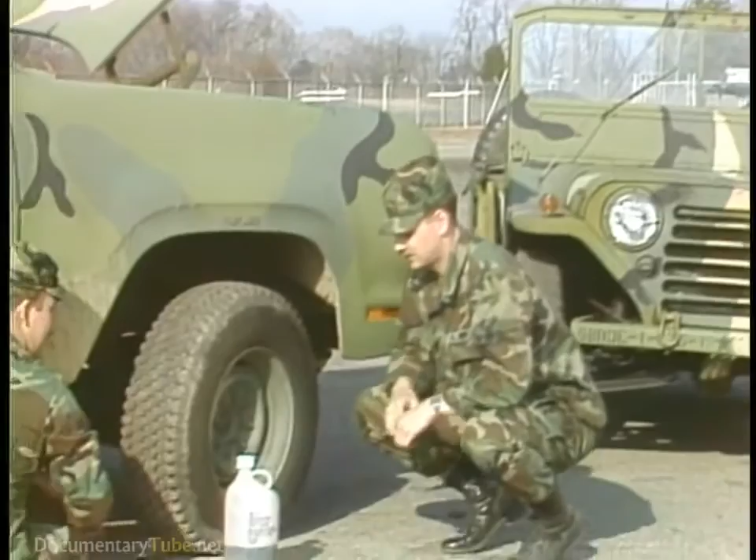When you have viewed this program, you should be able to understand the basic principles of hydraulic brake systems. You should be able to identify the components of the drum brake system used in the M151 and understand its principles of operation. You should also be able to identify the components of a disc brake system like that used in the M880 and understand its principles of operation.

In Part 1 of this program, we'll discuss basic principles of hydraulic brake systems that apply to both types of brakes, and then discuss the drum brake system used on the M151 vehicle. Part 2 will cover the disc brake system used on the M880 series vehicle. Get a good grip on the basic principles and you'll be in good shape to maintain brakes or troubleshoot and repair any hydraulic brake system you're working on.

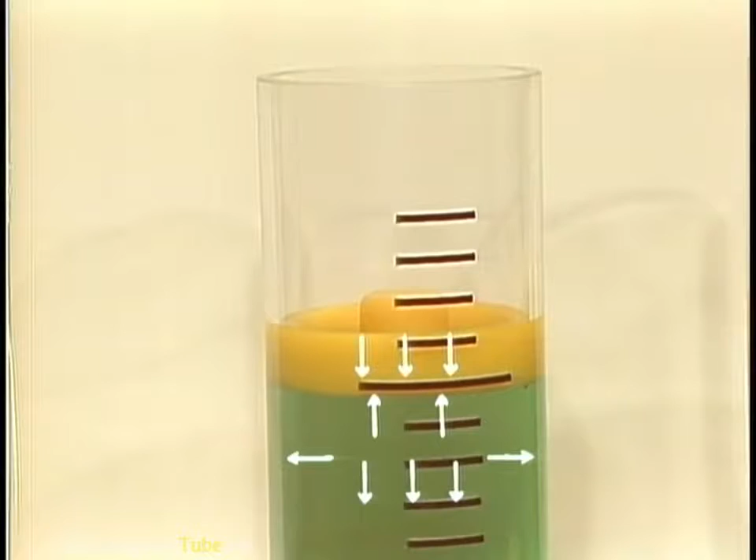First, let's look at basic principles of hydraulic systems because these control everything that happens in hydraulic brake systems. Under normal pressures, liquid cannot be compressed. This heavy weight, for example, cannot press the liquid down beyond its original level. It is, however, putting force on the liquid. This force acts in all directions, putting pressure on the weight itself and on the walls and floor of the container. The pressure is the same at all points.

Another thing about liquid is that it occupies the entire volume of the container, filling every space, no matter what its shape. This mock-up has a weight in each cylinder, and we'll call these pistons, like those you'd find in a hydraulic brake system. Let's watch what happens if we push down on one of the pistons, putting extra force on the liquid. The liquid is non-compressible, so its volume remains the same. The effect is to transfer the force to the second cylinder, where it acts on all surfaces, but only the piston is free to move, and so it rises.

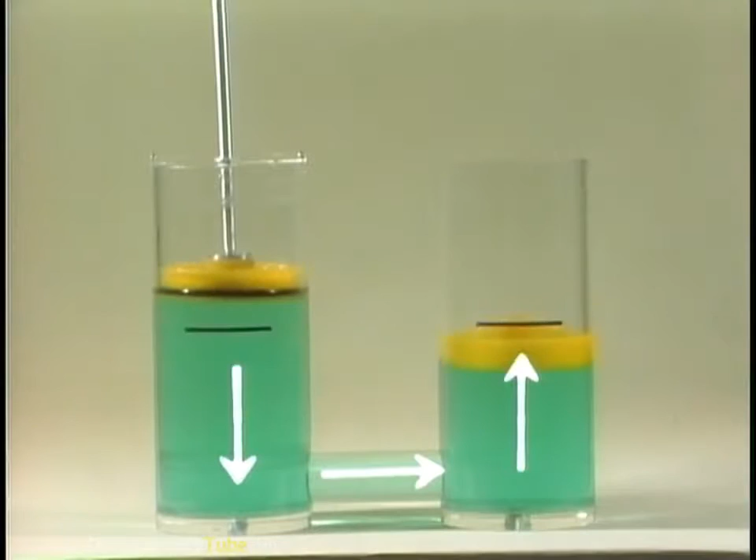Now we can see another important principle of hydraulics. The area of each piston is the same, so the right-hand piston rises by as much as the left-hand piston is pushed down. That's because the pressure is the same on the face of both pistons.

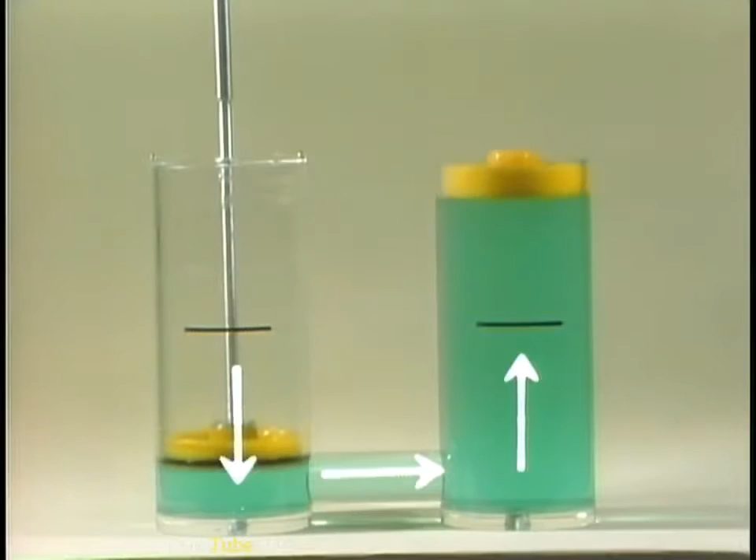Let's see what happens if one piston is bigger than the other. The small piston puts a certain amount of force on the liquid. At the larger piston, this same force acts on each area that's the same size as the small piston, so the force on the face of the large piston is multiplied by that amount. This means the force applied by one piston can be multiplied many times just by enlarging the area of other pistons in the system. One other thing happens. The smaller piston has to travel farther to raise the larger piston by the same amount as before.

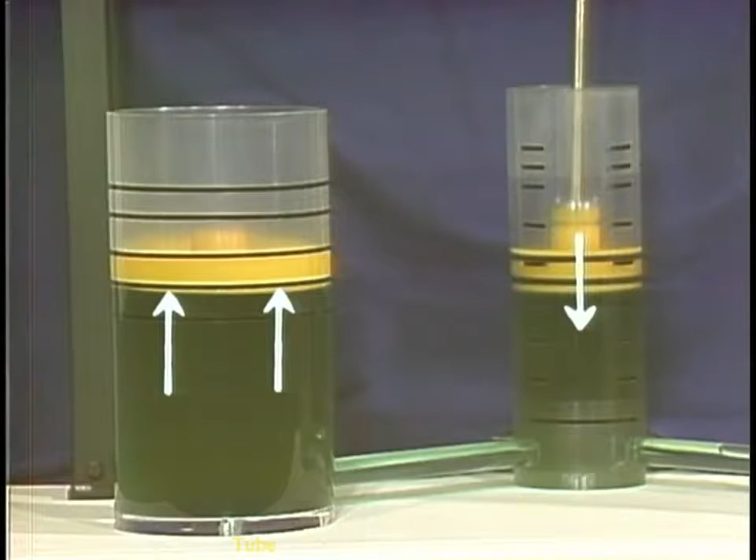The same things happen if, instead of one large piston, there are several whose total area is larger than that of the piston applying the force. Once again, the liquid can't be compressed, and its volume remains the same as force is applied, so the force is transferred to each piston in the system simultaneously.

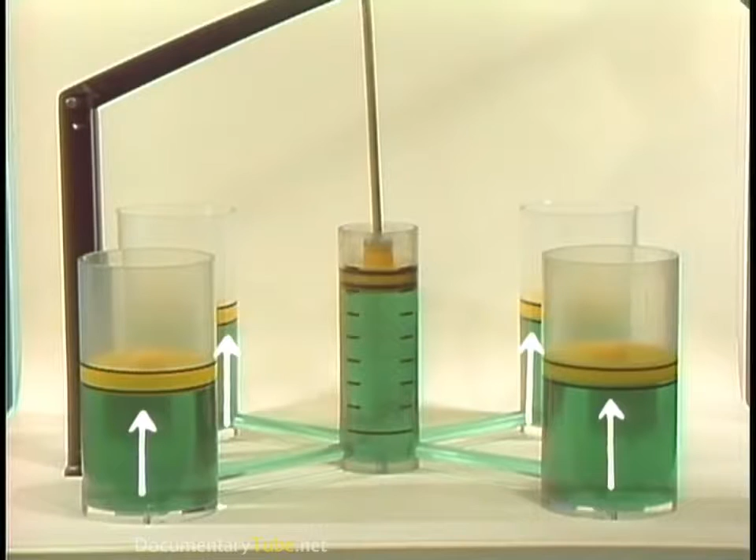This is like the situation in a hydraulic brake system. The cylinder with the piston that applies the force as the lever is moved is like the master brake cylinder. The connecting pipes are like the brake lines. And the four cylinders with pistons are like the wheel cylinders, except that in each M151 wheel cylinder there are two pistons, not just one.

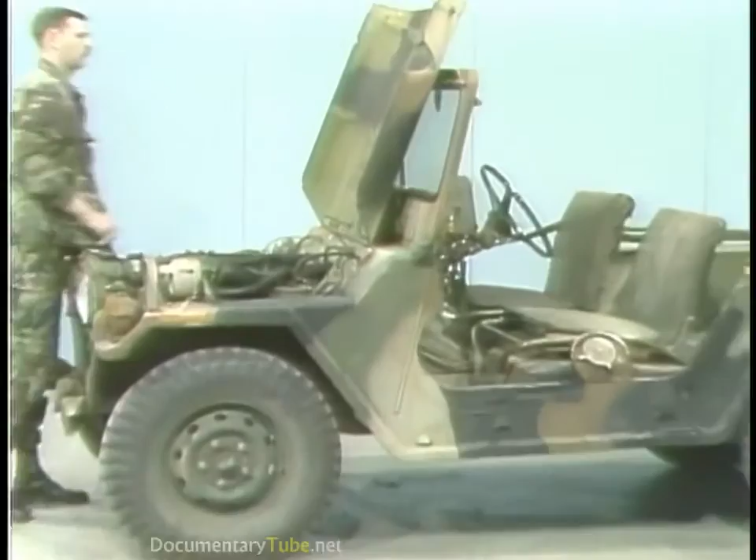Keeping the principles we've just talked about firmly in mind, let's look at each of those components as they appear in the M151 drum brake system. Let's start by looking at the master brake cylinder. It's hard to see because of the way it's installed, so let's look inside the vehicle. The master brake cylinder is the heart of the hydraulic brake system. The brake pedal moves a piston inside the cylinder by means of this push rod.

A reservoir containing brake fluid is filled through this neck. Brake fluid also fills the brake lines through this outlet. They connect the master cylinder to the wheel cylinders at each wheel assembly. For a closer look at a wheel cylinder, let's go right into the brake assembly with the wheel and brake drum removed.

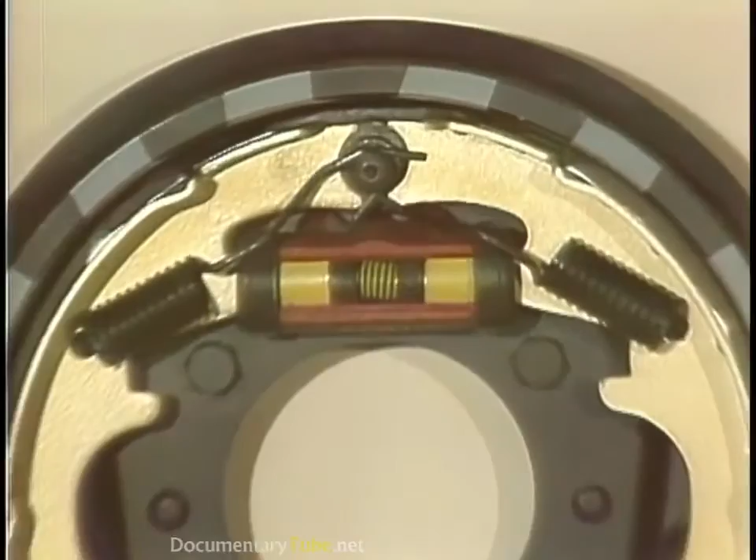In the M151, the wheel cylinder is located near the top of the brake assembly. Pistons inside the wheel cylinder bear against the studs of two brake shoes. These brake shoes are retained by springs, so they are fully floating and self-centering.

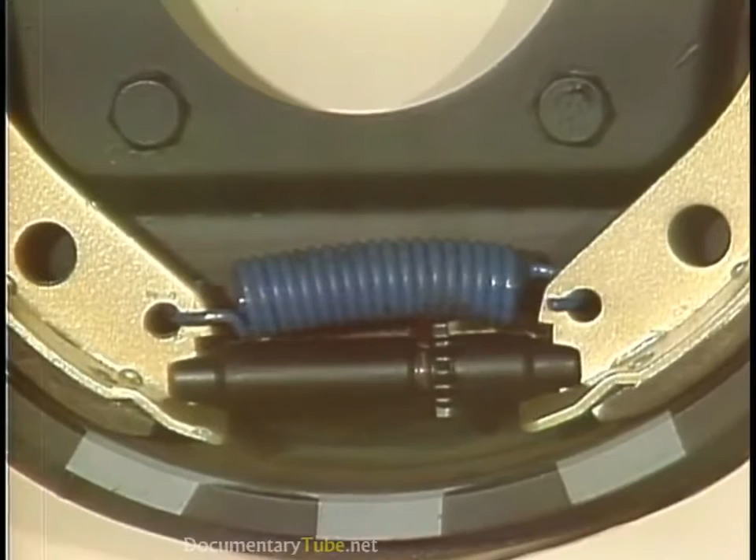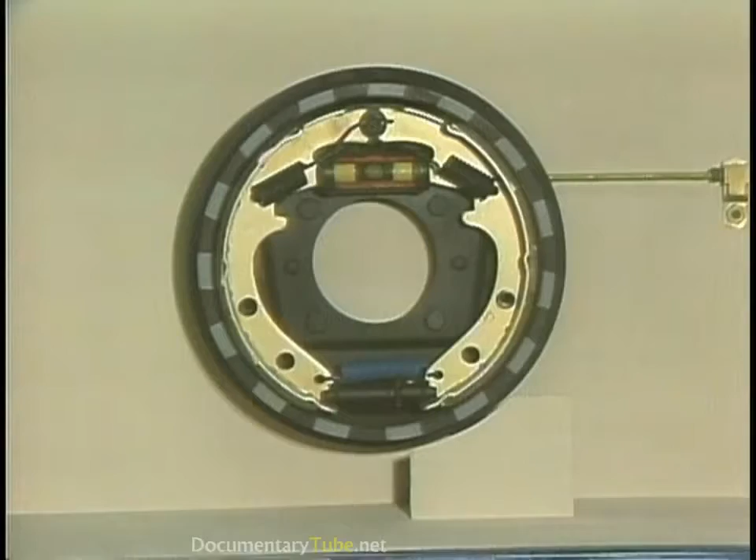The base of the shoes engage an adjusting screw, often called a star wheel, and are coupled to it by a return spring that also helps pull the shoes away from contact with the drum. Upper ends of the shoes fit against a hold-down anchor pin at the top of the brake assembly. The brake shoes are surfaced with linings that will wear down as the brakes are used.

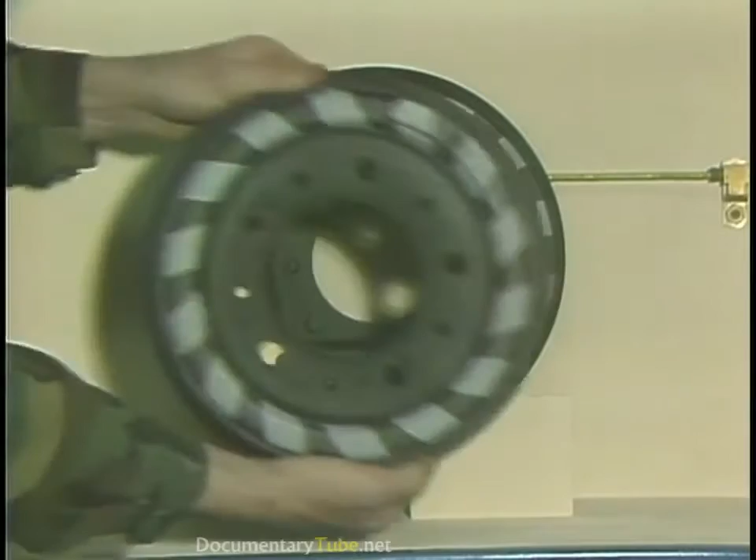The brake drum mounts over the brake shoes, which apply pressure to the inner surface to stop wheel rotation. Now, we'll concentrate on the principles of operation of a service brake system using drum brakes like that in the M151.

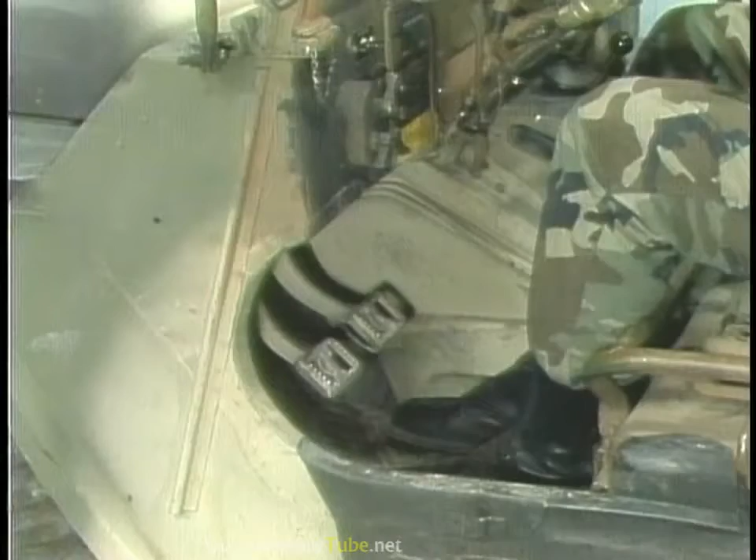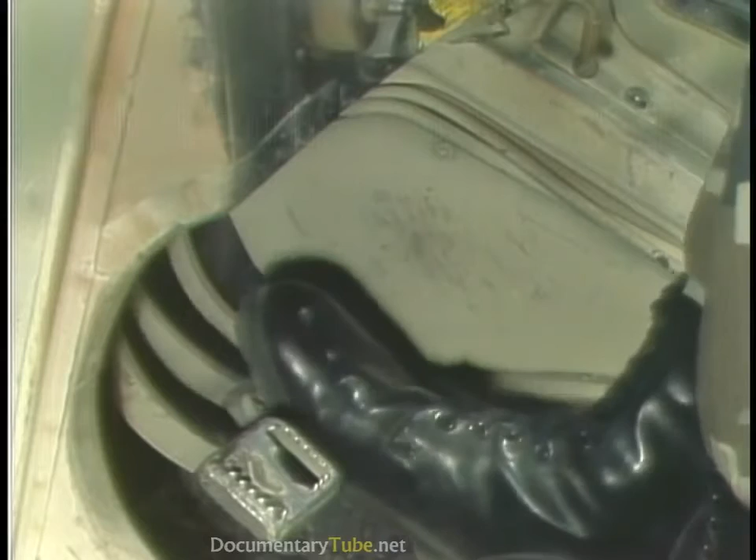In this system, the brake pedal is a lever that multiplies the amount of force applied by the operator by mechanical means. But that force is multiplied further by the hydraulic system. So first, let's look at the active hydraulic components: the master cylinder and wheel cylinders, to see how that happens. Then, let's see how all parts operate as a system to make the drum brakes work.

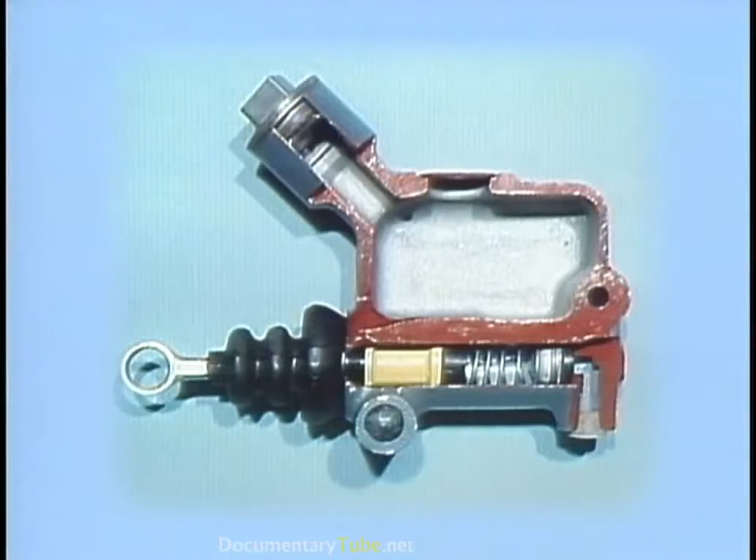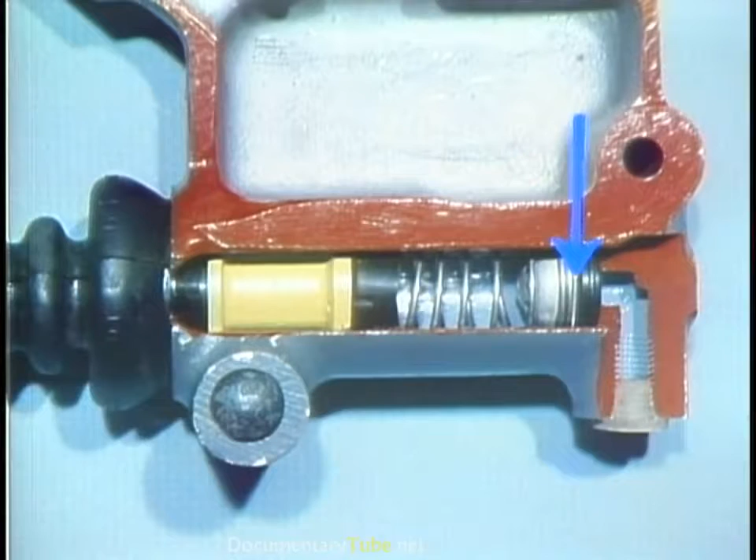The master cylinder has two basic sections. One is a storage area called a reservoir for the fluid. The other section is a cylinder which contains a spool-shaped piston. Small holes are drilled through one rim of this piston. The cylinder also contains two sealing cups, a return spring, and an outlet check valve called a residual pressure valve with its own spring. A push rod transfers brake pedal action to the piston.

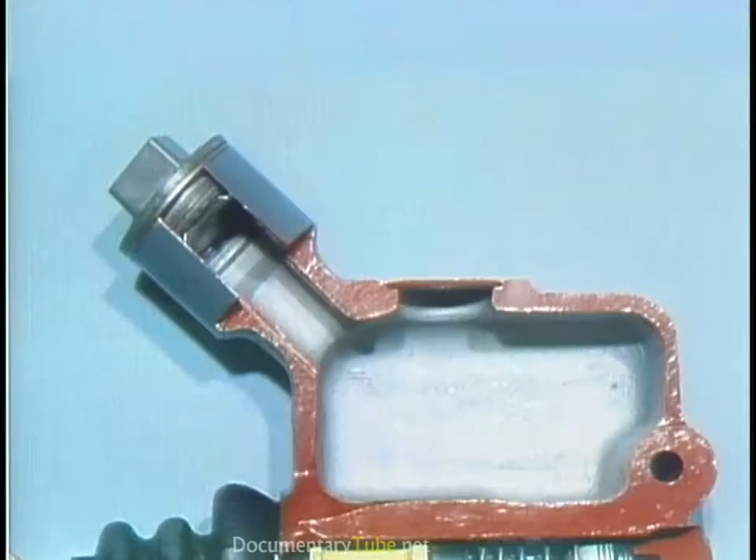The reservoir contains a supply of brake fluid. It's important to leave some space above the brake fluid to allow for expansion. Brake fluid must not be allowed to drain out of the reservoir completely, because this will let air into the brake lines, and we'll see what effect that has later. Your manual will tell you what the proper level is. Keep it there at all times, and you won't get yourself or the users of the vehicle in trouble.

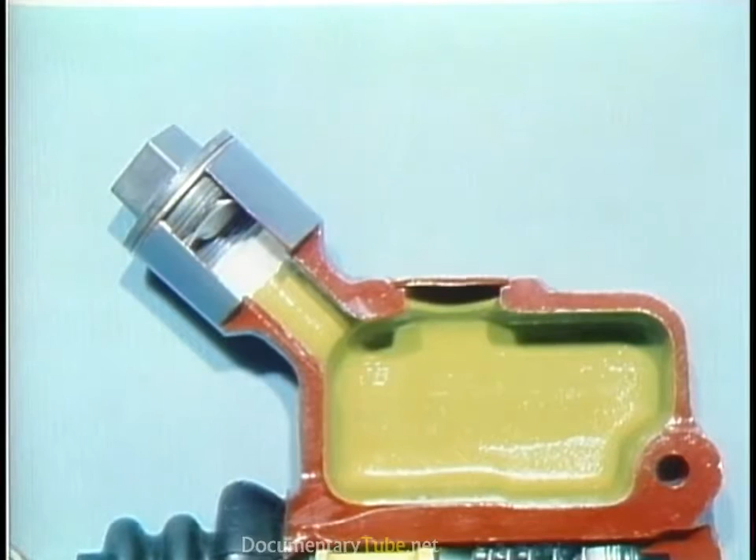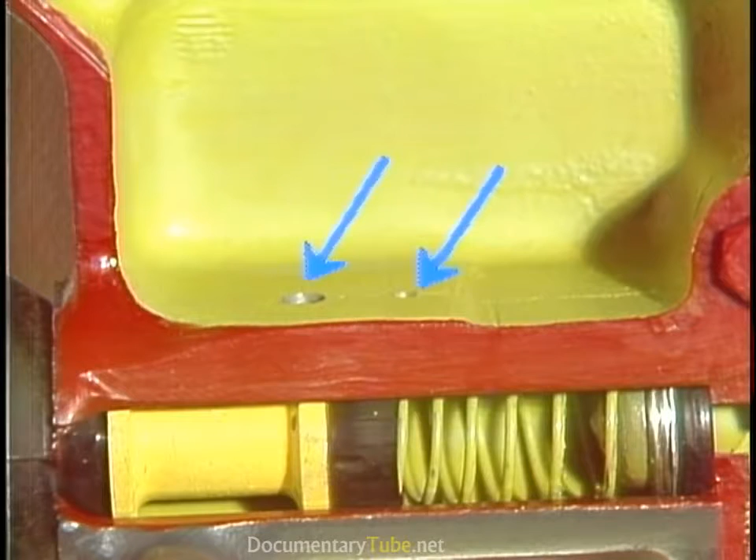One thing more about brake fluid: it absorbs water, which could cause serious problems throughout the brake system, so keep the reservoir tightly covered at all times. The two ports in the base of the reservoir provide pathways for brake fluid movement. The filler port is larger and supplies brake fluid to the system. The compensating port is smaller and allows passage of expanding or contracting fluid.

Fluid movement is controlled by the action of the piston and two cups, which both point forward. As the push rod transmits pedal motion, the spring applies force against the residual pressure valve, while at the same time the piston cup closes the compensating port. This primary cup faces forward, and as piston motion continues, it seals in the pressure that now starts building up in the outlet end of the cylinder.

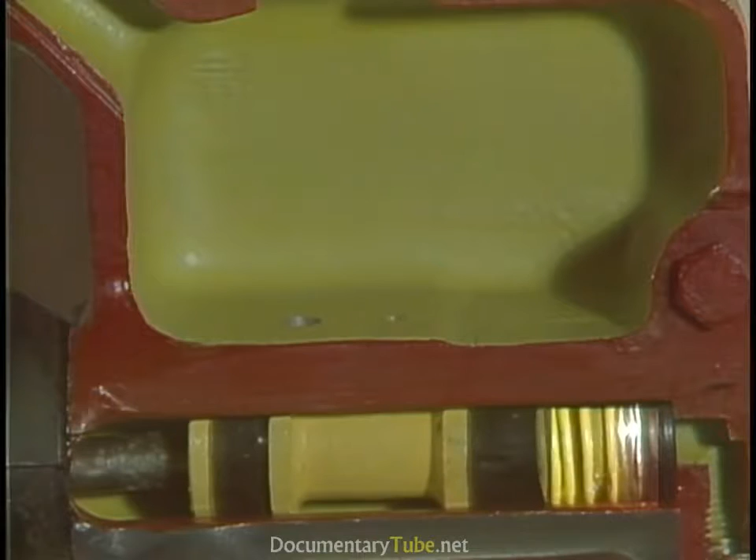This fluid pressure unseats the residual pressure valve, opening the way for the brake fluid to pressurize the brake lines and wheel cylinders. We'll look at what happens there in a moment. For now, let's follow the action in the cylinder when the brake pedal is released. The spring drives the piston and sealing cup backward, and so pressure forward of it and in the brake line drops.

This brake line pressure bears against the residual pressure valve, tending to hold it open. But eventually, as brake line pressure decreases, the spring overcomes its force and reseats the residual pressure valve. This traps a small amount of pressure in the brake lines and wheel cylinders, and we'll see the effects of that later. As piston motion continues, the compensating port is reopened. Brake fluid flows back into the reservoir through this path.

Also, the return spring pushes the piston back faster than fluid can return. This drops the pressure ahead of the cup, so it is now free to flex and unseal the holes in the rim of the piston. Fluid can now return to the outlet end by this path, ensuring that this space will be completely filled for the next braking action. The spring drives the piston back against its stop to complete the braking cycle. Because the secondary cup at this end of the cylinder also faces forward, no brake fluid can leak out of the system.

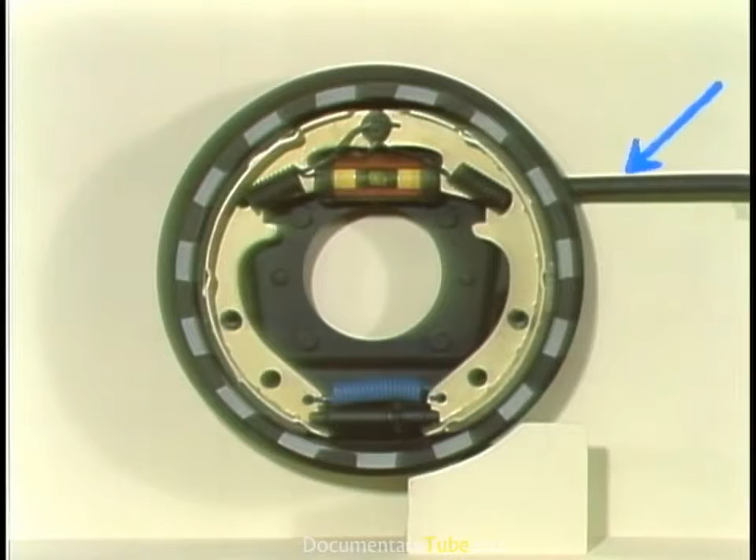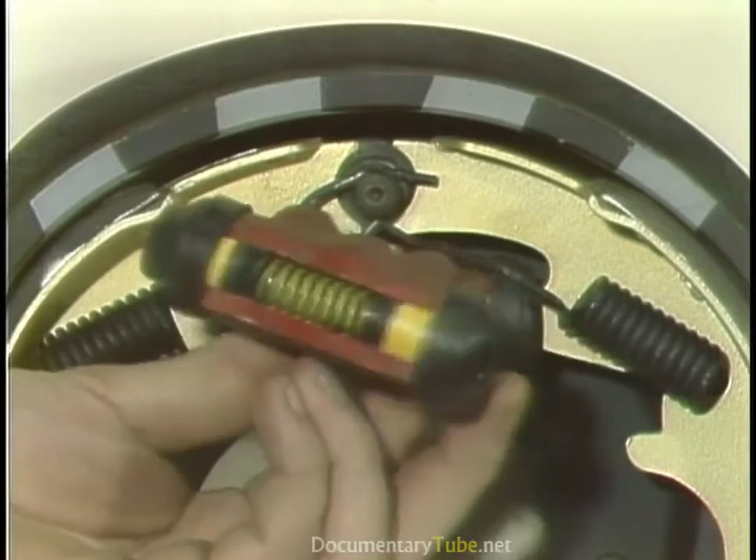Now, let's get into the other active hydraulic component, the wheel cylinder, and see how that operates. This device is connected to the steel brake lines by a flexible tube that allows for turning and up and down movement of the wheel. Inside are two pistons that bear on the brake shoes, a spring that positions sealing cups against the pistons, and a bleeder valve that lets you get rid of air in the brake system, as we're showing you here on another wheel cylinder.

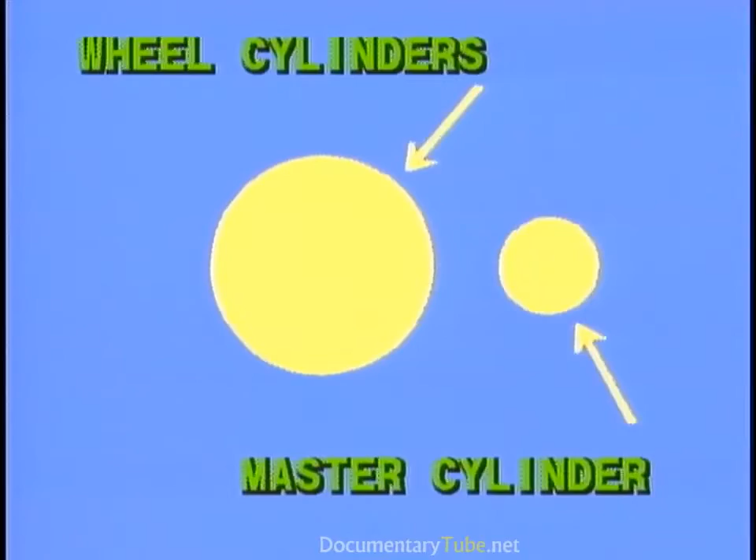The combined area of the wheel cylinder pistons is larger than that of the master cylinder piston. So the force that the master cylinder piston applies is multiplied several times, adding to the force provided by brake pedal leverage. As the piston in the master cylinder puts pressure on the brake fluid, this forces the wheel cylinder pistons to move the brake shoes apart. We've exaggerated the action here so you can see what happens. Brake shoe springs return the pistons to their stops as brake pedal pressure is released. The piston cups face inward, and so prevent brake fluid from leaking out.

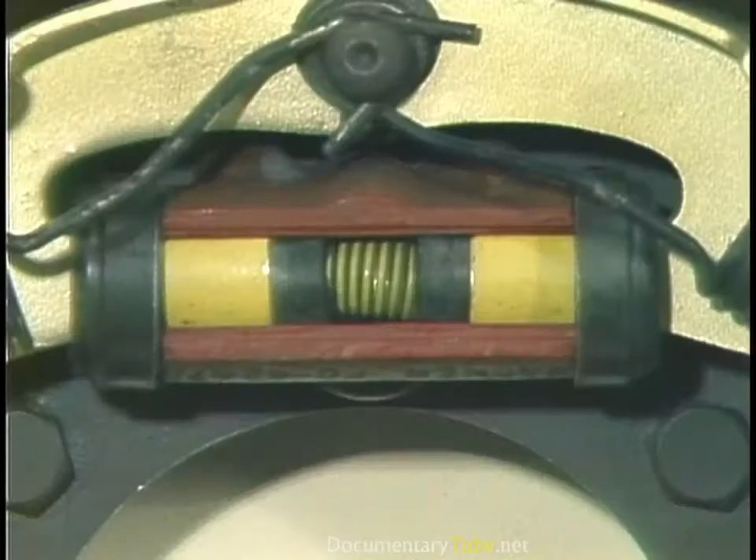Now we're ready to look at the entire drum brake system and see how it operates. You can control the amount of braking power the hydraulic system will deliver, all the way from slowing down wheel roll to wheel lock, by the amount of pressure you put on the brake pedal.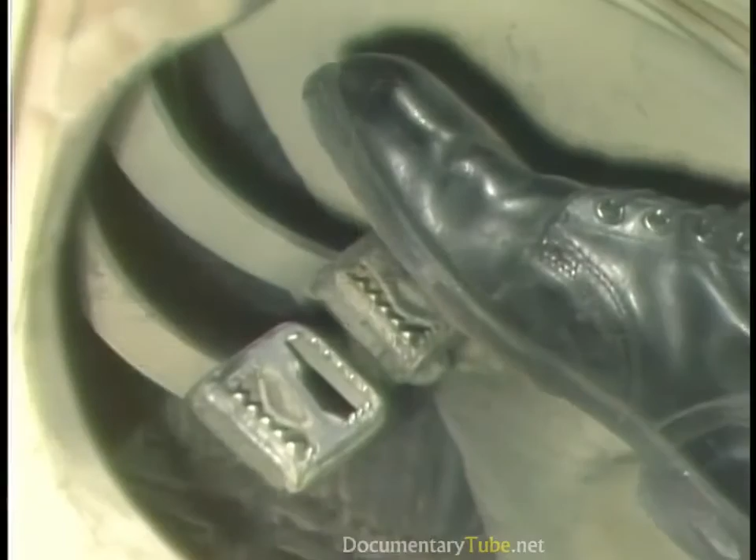Here's how it works. Remember that the brake pedal acts on the master cylinder piston the same way the lever acted on the piston in our hydraulic system demonstration a while back. The brake fluid is not compressible, so the further the lever pushes the piston, the further the fluid pushes the second piston. The same thing happens in the drum brake system. The result is that as pressure on the brake pedal increases, so does the pressure exerted on the brake shoes by the wheel cylinder pistons.

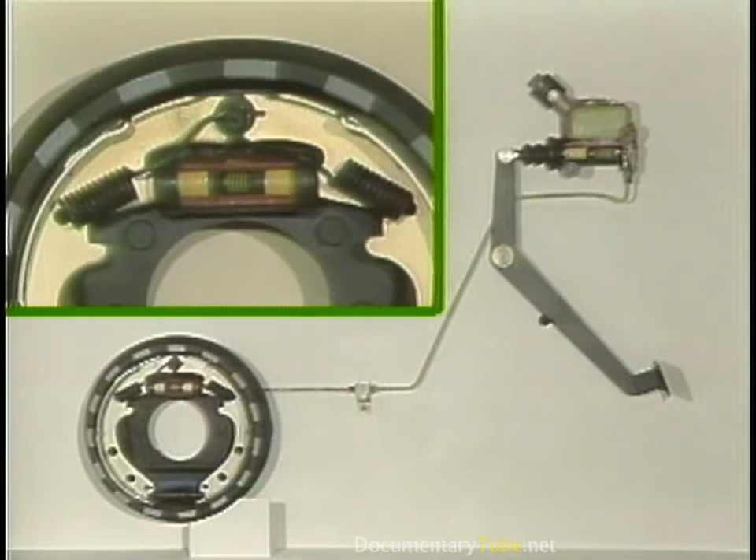Let's look at the situation using just one drum brake assembly, remembering that the same things happen at the same time at each wheel. This area is the braking surface of the drum. Actually, the gap between brake shoe linings and the brake drum is very small, but we're making it larger here so you can see what's going on.

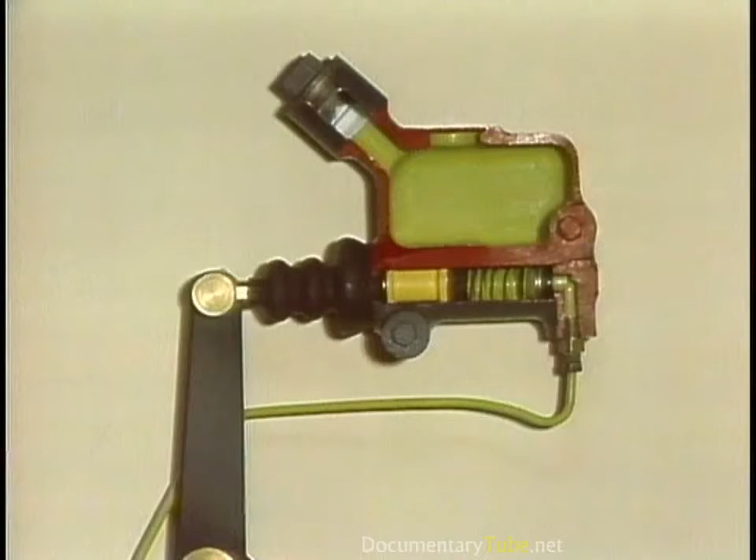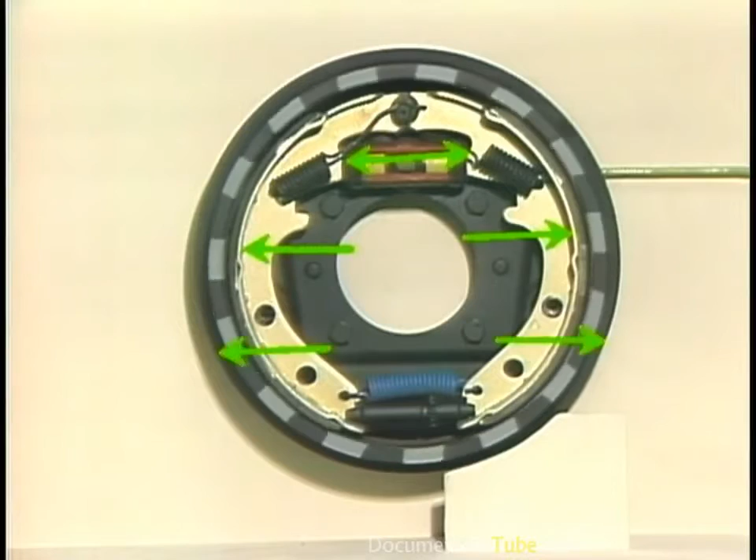Let's say the wheel and the brake drum assembly attached to it is rotating. Now, let's push down on the brake pedal. The master cylinder piston transmits force to the brake fluid in the brake line and in the wheel cylinder. Both pistons are forced outward against the brake shoes, and these in turn are forced into contact with the brake drum. The friction between the brake shoe lining and brake drum begins to slow the wheel down slightly.

Now, let's push down harder on the brake pedal. Because the brake fluid can't be compressed, it transmits this increased force against the wheel cylinder pistons, increasing the pressure against them. The wheel cylinder pistons push harder against the brake shoes, the brake linings harder against the drum, slowing the wheel even more. The master cylinder piston will increase pressure high enough to cause the brake assembly to slow the wheel to full stop or wheel lock.

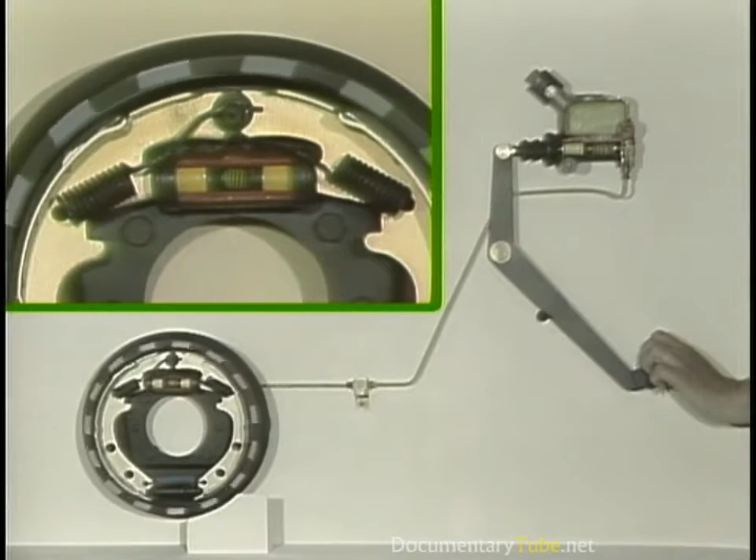Releasing the brake pedal lets the return springs pull the brake shoes back from contact with the drum and drive the pistons back to their stops in the wheel cylinder. The master cylinder piston, driven back to its stop, allows pressure in the system to decrease, but the residual pressure valve closes, keeping just enough pressure in the brake line and wheel cylinder to keep its sealing cups pressed against the pistons. These face inward, so no brake fluid can escape from the system.

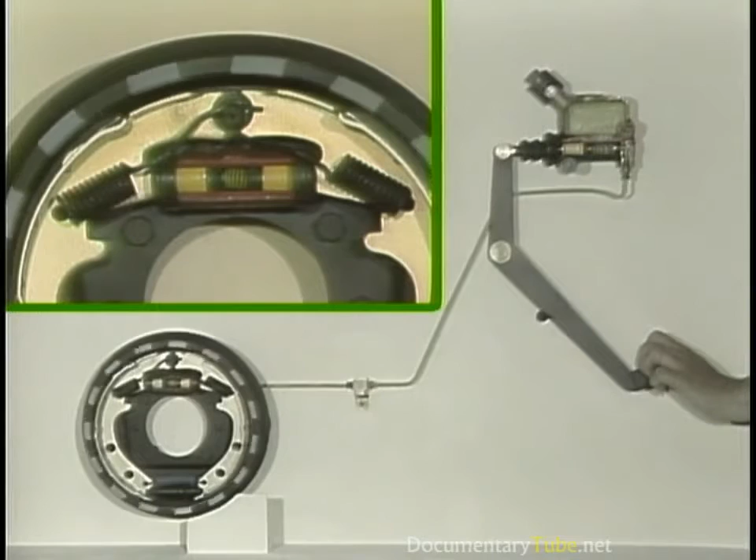If there is a lot of repeated braking action, the friction between brake shoe linings and drums will generate excessive heat. This heat can also heat up the brake fluid in the wheel cylinder, causing it to expand back up the brake lines to the master cylinder, where it later returns to the reservoir through the compensating port.

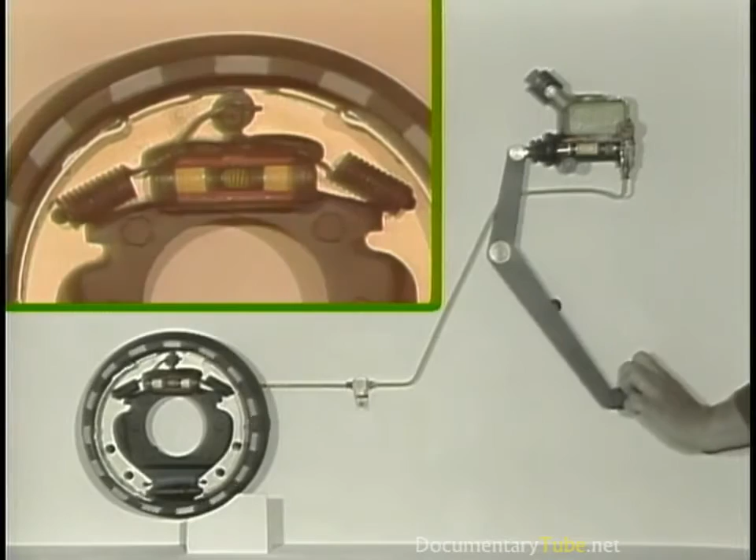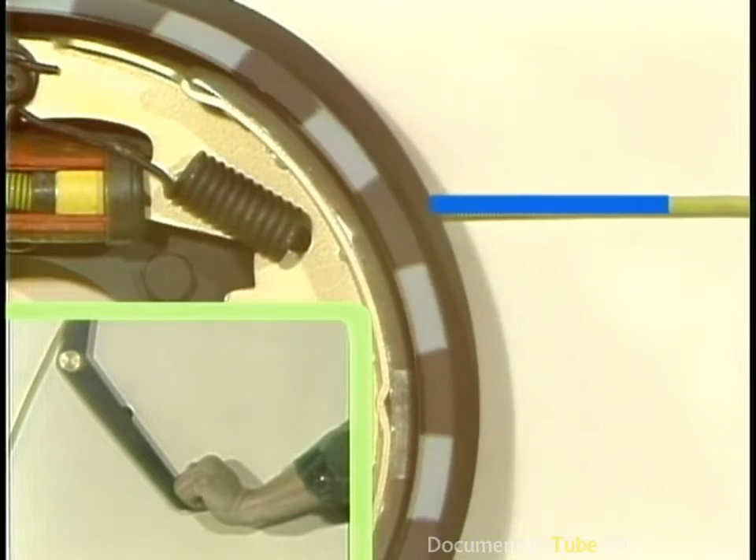Now, let's say some air is trapped in the brake line near a wheel cylinder like this. Air is compressible, and that can cause problems. Let's again push down on the brake pedal until the brake linings make first contact with the brake drum. So far, so good. But now, let's push down harder. Here's where the problem shows up. The increased pressure in the brake fluid presses against the air bubble and it shrinks.

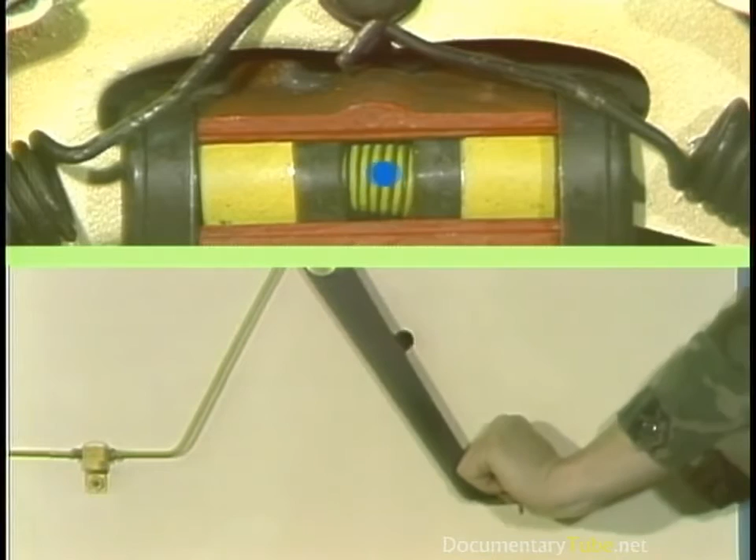Let's say the air bubble gets forced into the wheel cylinder. Plainly, the full force generated by the master cylinder piston is not being transmitted to the wheel cylinder pistons, and brake pedal action feels spongy. It takes a lot more pedal pressure to bring the wheel to a full stop, and the air can cause uneven vehicle braking. That's why it's so important to follow directions in the manual for bleeding air from hydraulic brake systems anytime you work on them.

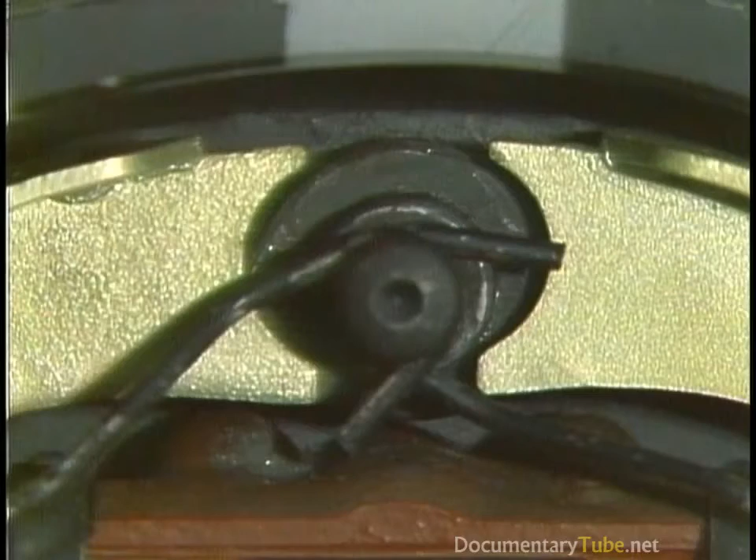There's something else going on in a drum brake system you need to know about if you're going to really understand how this system operates overall. When drum brakes are applied, both shoes initially contact the drum with equal pressure. This is the reason why the space on each side of the anchor pin is equal. However, friction between the rotating drum and shoes tends to pull the shoes around with the drum. When this happens, one shoe is forced farther away from the anchor pin. This in turn forces the other shoe tightly against the anchor pin.

Increased friction at this point tends to make both shoe assemblies pivot, using the anchor pin as an axis. If the drum were not present to contain the shoes, the action would look like this. Since the drum is present, the shoes are forced into tighter and tighter contact with the drum. This is what is meant by the term self-energizing in reference to brake systems. This action thus multiplies the force of the brake shoes on the brake drum.

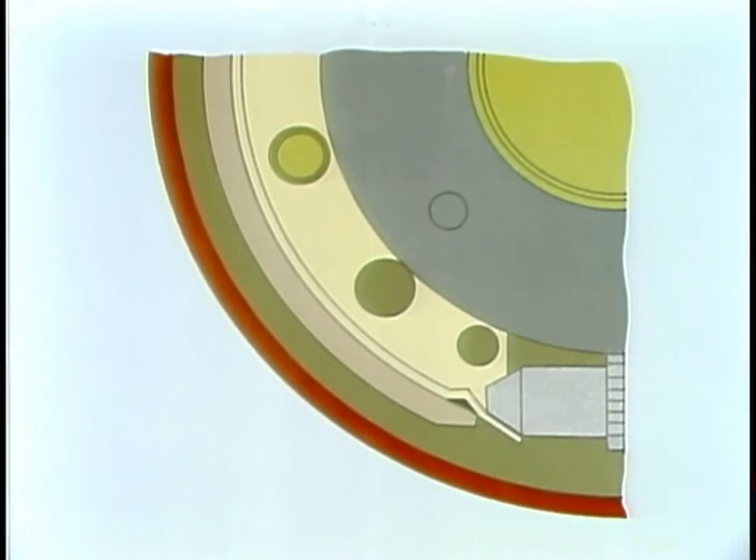One more thing you need to know about drum brake operation. You'll remember we said brake linings will wear with use. The brake pedal then has to travel farther to force the brake lining to make contact with the drum. To close this gap to normal, you'll be using an adjustment tool to rotate the star wheel on the adjustment screw. This will return brake pedal travel to normal. Excessively worn brake linings will of course have to be replaced so the shoe doesn't score the drum surface.